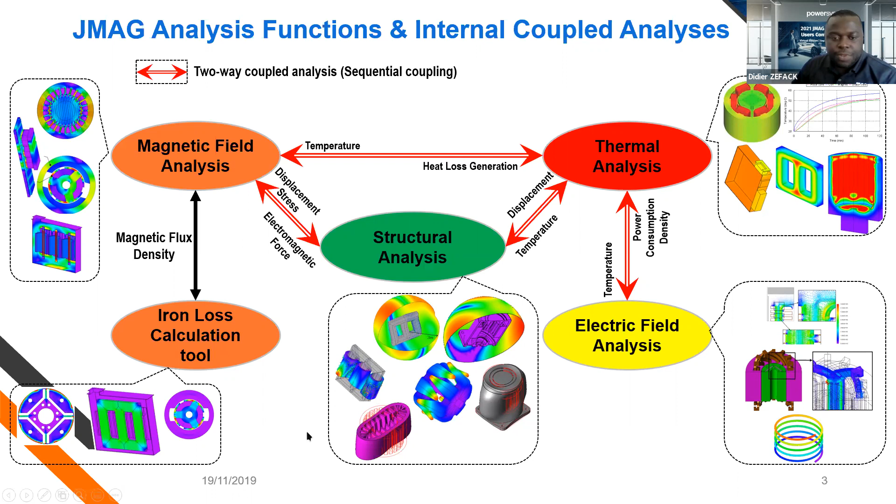But now with the new version, it is possible to make a three-way coupling using three solvers. First the thermal, where you evaluate the temperature. Then you have the structural analysis, where based on the temperature, for example, you're able to evaluate the displacement and the stress. And you also have the magnetic field, where you'll be able to evaluate the forces and the losses. With these three solvers, you are able to make a loop.

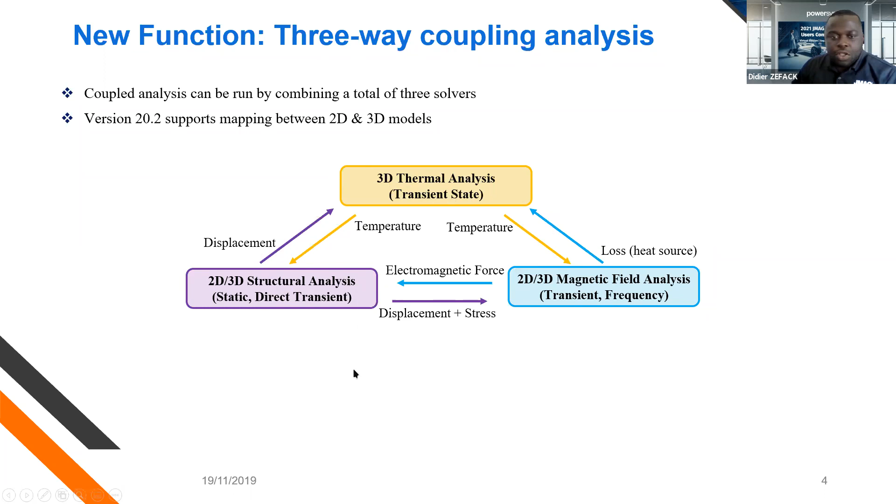The process is very simple to run. In the first cycle or first step, you will start the thermal analysis in order to initialize all the domain. Then JMAG will run next the structural analysis, where you try to evaluate the displacement and stress based on the temperature sent by the thermal. And in the last step of the first cycle, you will have the magnetic field analysis, where you evaluate the electromagnetic forces and the losses based on the output data of the thermal and structural analysis, so the temperature, displacement, and the stress. Then into the next cycle, it will do the same process and so on.

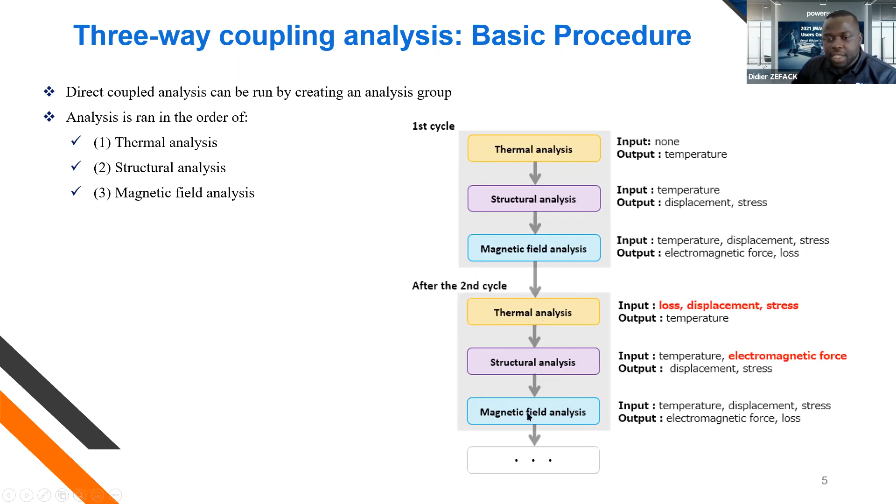The advantage of the coupling is that you are able to manage the simulation time. You have different possibilities. The simple way is to define the same time for all the analyses. The next case is to define different time intervals, so the time interval of the thermal analysis is different from the time interval of the structural analysis, which is different from the magnetic analysis. We also have another case where the total simulation time is different, and also the time interval is different.

And the last possibility is that you can combine transient thermal and transient structural with frequency analysis of magnetic. Yeah, this is possible.

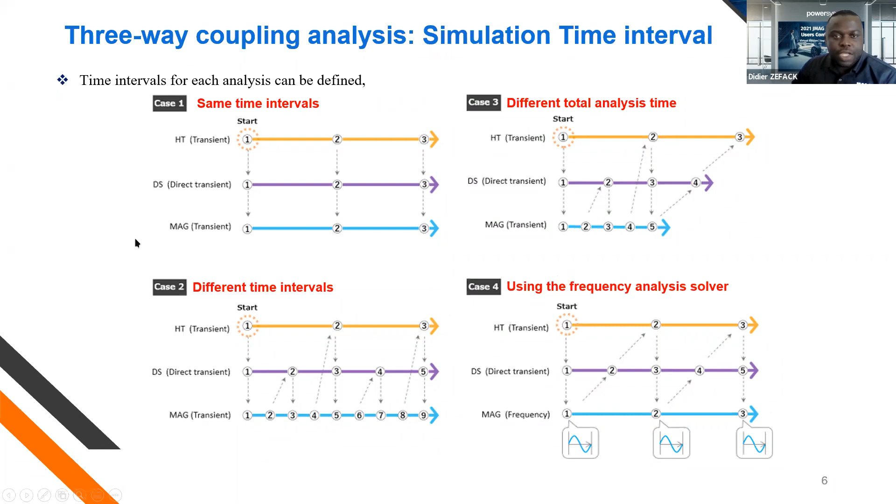So the first application that I want to show you is about the sample thermal expansion effect on the stator. Here I will try to simulate, for example, the effect of the temperature on the deformation of the stator shape. So this is the three analyses that I will build.

The magnetic, where I will calculate the losses, and then the loss will be sent to the thermal, where I will calculate the temperature. Then into the structural, I will calculate the displacement and the stress, and I will make the loop between the two analyses to exchange some data. The structural will send the displacement to the thermal, because the displacement can affect the thermal coefficient, like the thermal conduction coefficient or the thermal convection coefficient. And also the displacement and stress can be sent to the magnetic, because the material property can depend on the displacement and the stress.

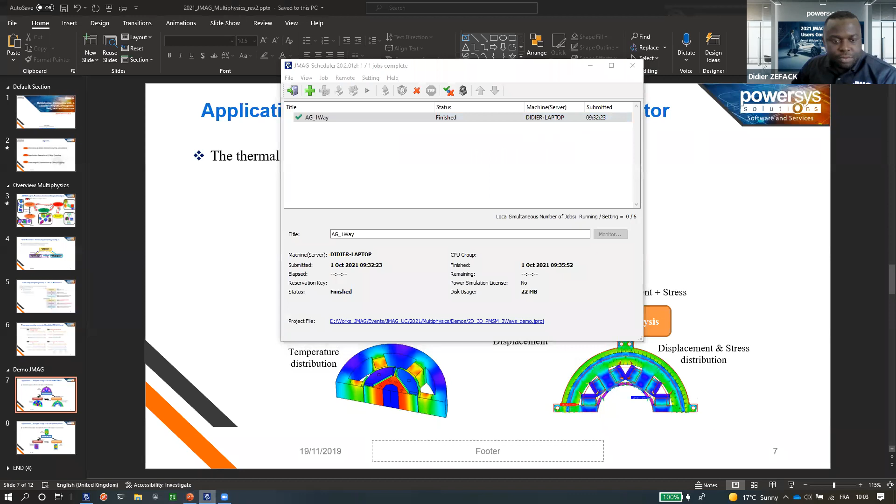So let me go back to JMAG. This is the 3D model that I built. Here I try to run first a one-way coupling, meaning that I will run firstly the magnetic analysis to calculate the loss. Then the loss is sent to the thermal, where I will evaluate the temperature, and the temperature can be sent to the structural analysis to evaluate the stress. But here with the one-way coupling, there's no loop between the analyses. And here you can see that I have created the analysis group, because in JMAG you have the advantage to create an analysis group, where you can group several studies around it.

Let me start with the thermal. Here I can duplicate it, let's say.

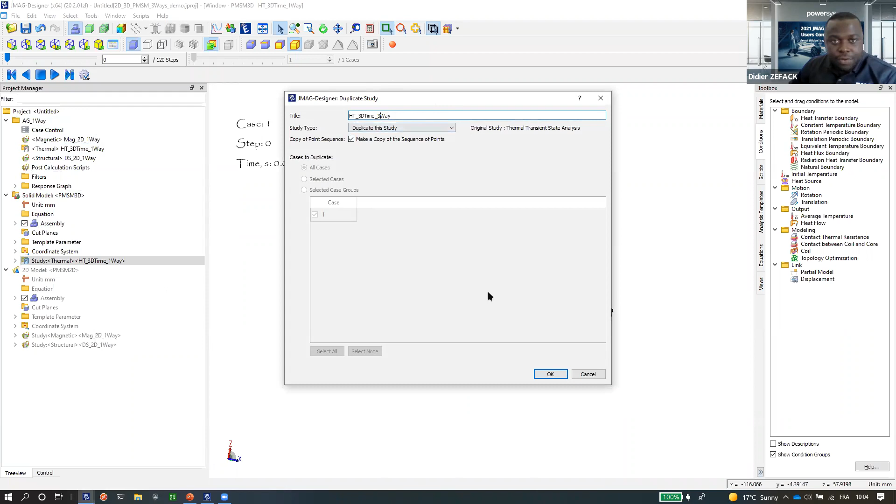So into the setting, the first thing to do is to go to the study property. Here I will select that I want to make a direct coupling to make a loop, and also into the study condition. Here the setting is standard, like the normal thermal analysis.

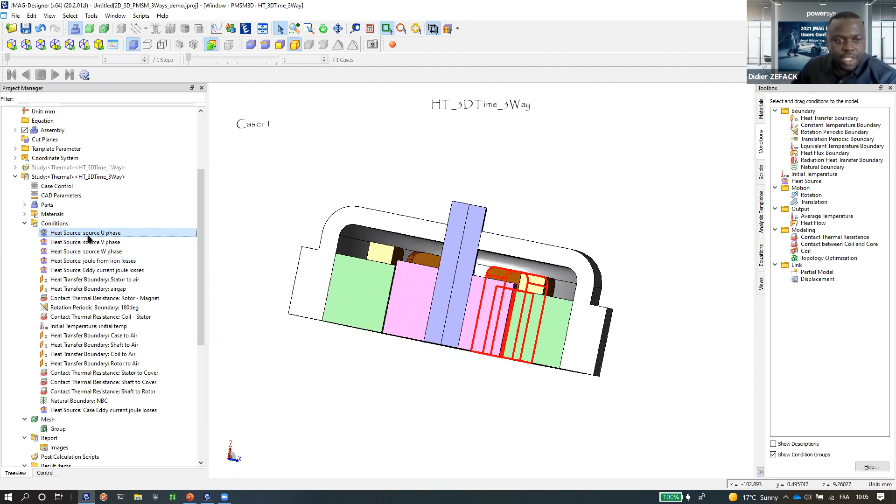Here you will need to define some heat source condition in order to import the loss calculated into the magnetic calculation. If I duplicate, here you can see I run a one-way coupling, specifying the magnetic calculation just to import all the losses. But here I don't want to run the one-way, I want to run the two-way, so I will select a two-way coupling.

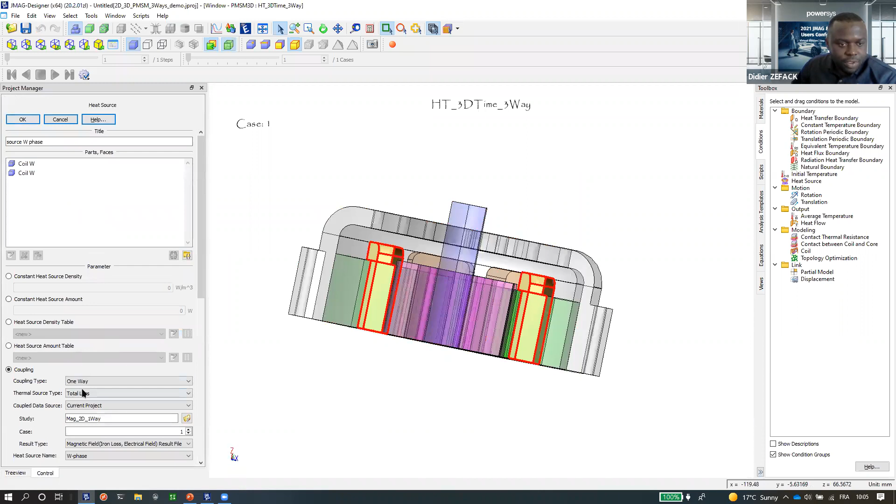I can also do that for the iron loss, because here I can also import the losses. So here I will say that I want to make the loop with the magnetic calculation, and also the other losses, like the eddy current losses. So here I will say that I want to make a loop.

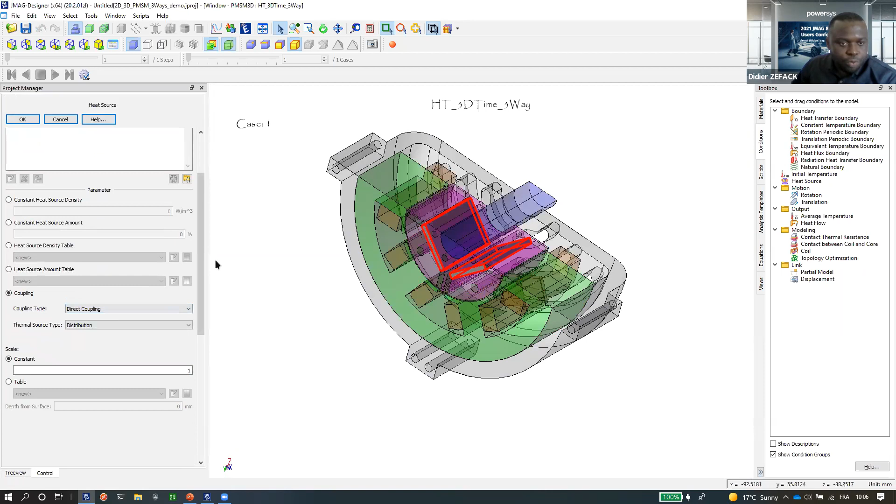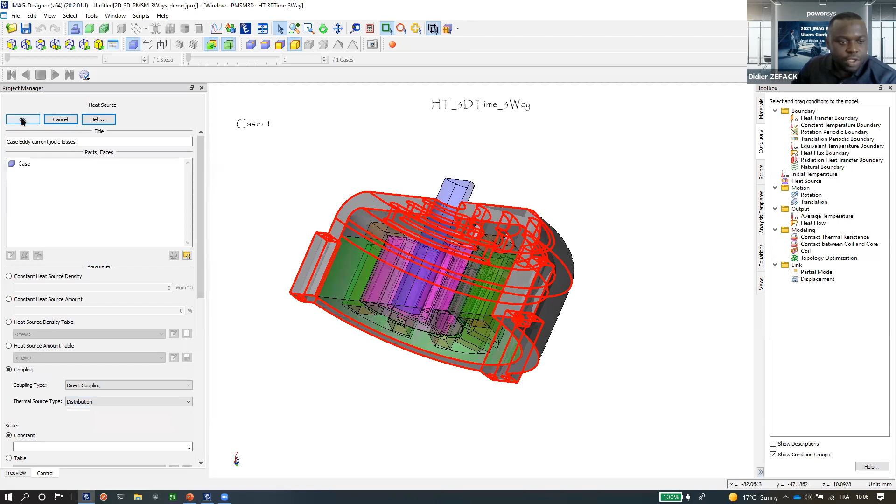Also for the casing, the housing, because in the magnetic I'll also calculate the eddy current losses that you have into the casing. So here I can also say I want to make the loop with the magnetic calculation, to take into account the displacement calculated by the mechanical. So here you can add the displacement condition.

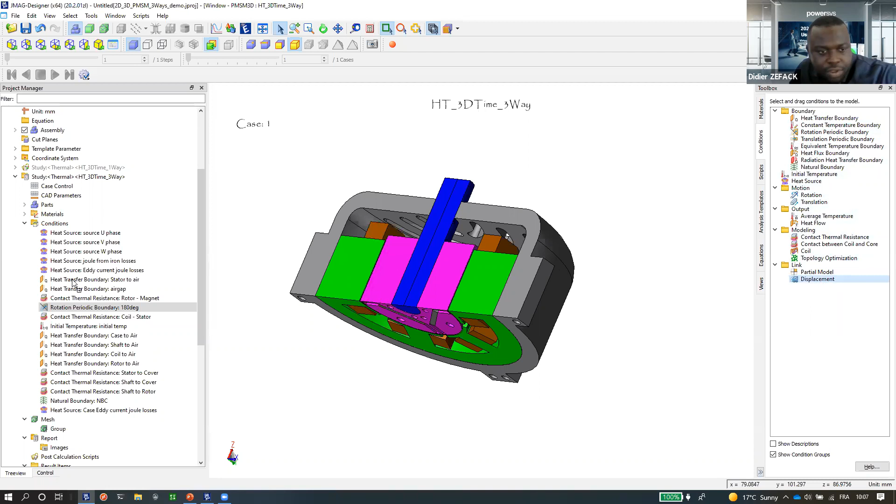I will apply it to the stator only. See here, I will select the coupling, and I can define the name stator.

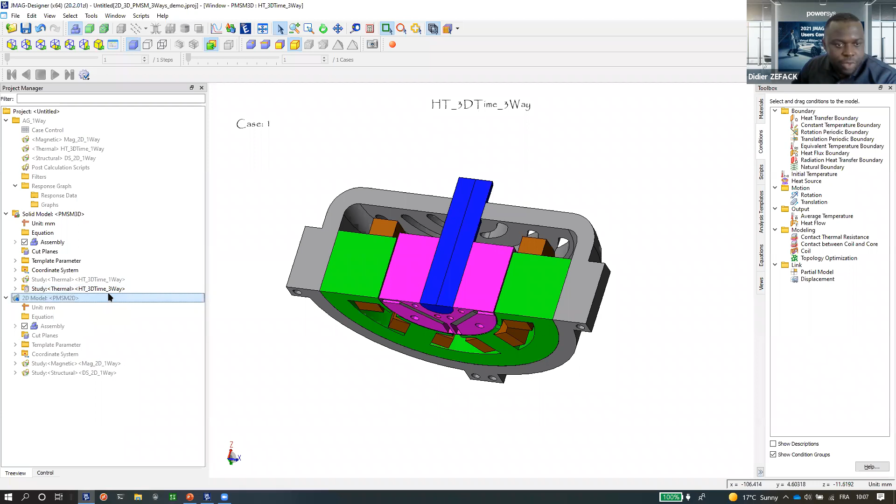So this is the first thermal three-way analysis, and here I will also do the same setting for the magnetic calculation property coupling. Here I will select direct coupling.

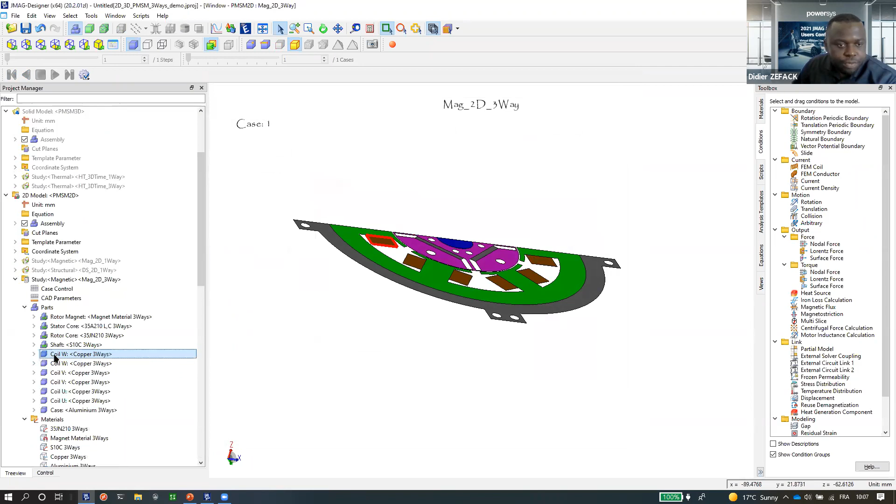Sorry, let me duplicate the calculation. Coupling, yeah. Property, coupling, I will select direct coupling.

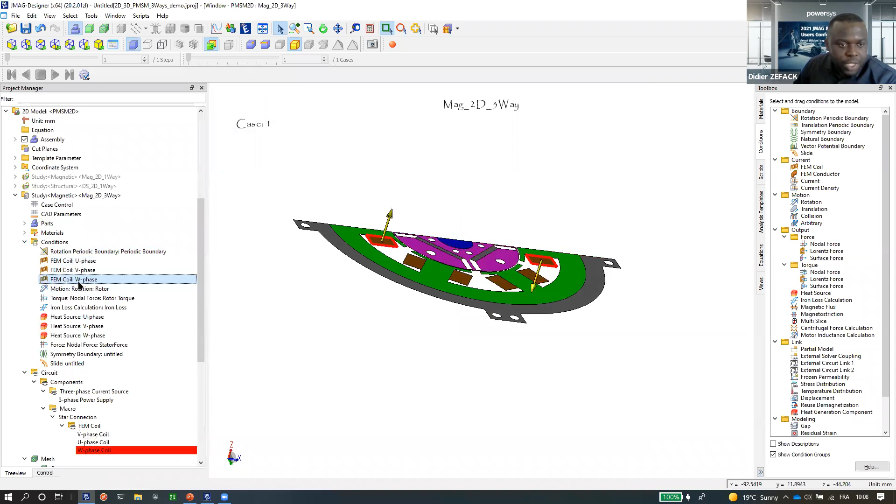So here into the magnetic, the setting, the condition is the same like the normal modeling of the magnetic calculation, but for the coupling with thermal, you need to add the heat source condition in order to send all the losses to the thermal analysis.

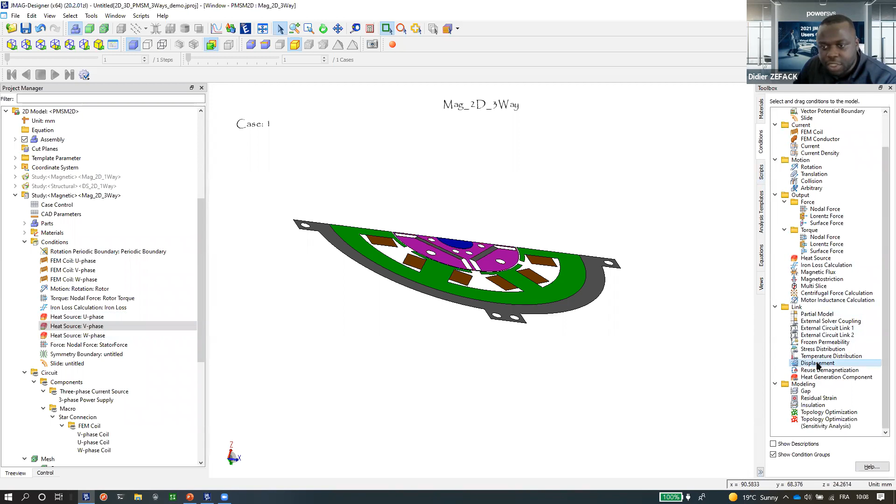But to take into account the stress and the displacement, here I can also add the displacement condition. Say for the rotor, for example, I will say direct coupling, stator. I can also add the stress distribution. I will say one-way coupling.

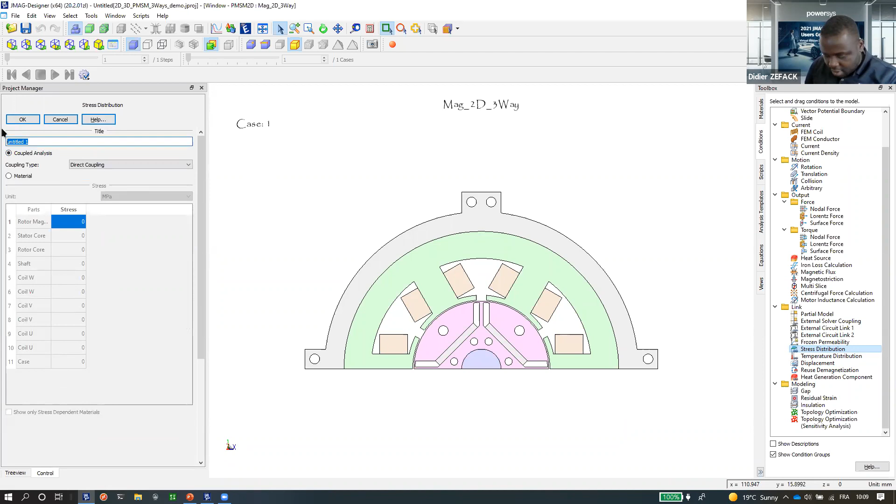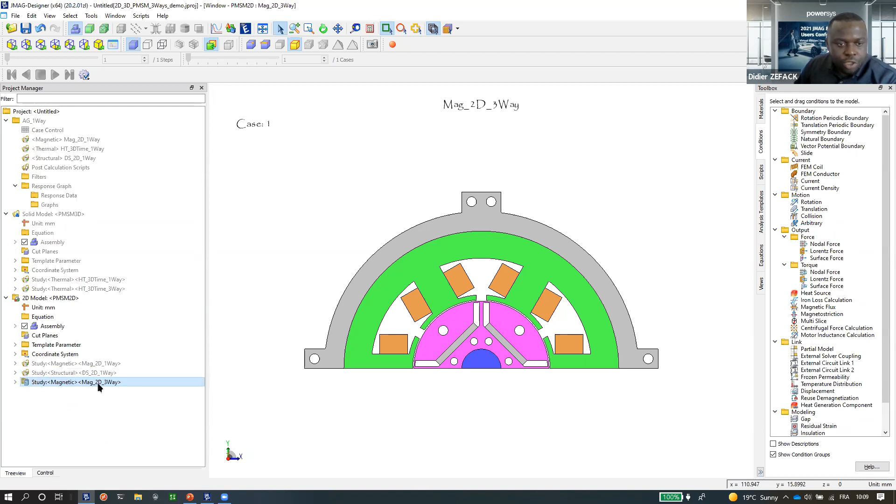So here I have now my magnetic model for three-way coupling. So I will do the same with the structural.

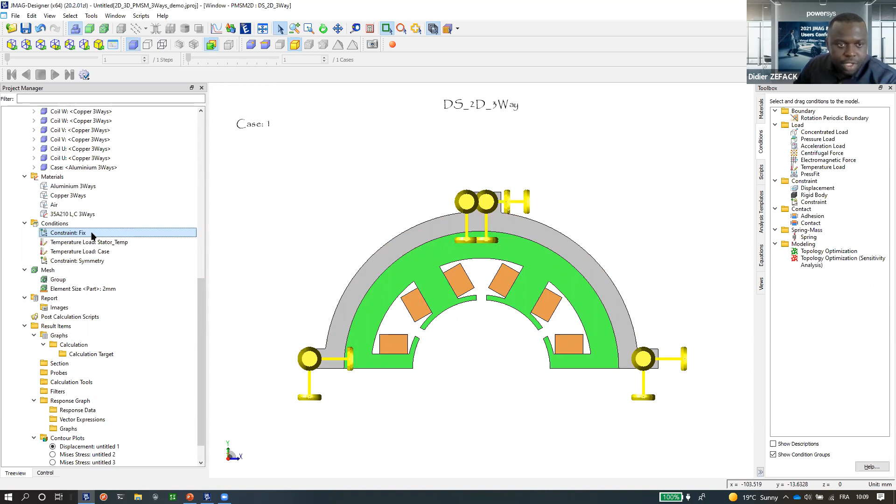Okay, so now it's finished. So here I have my thermal model, I have my magnetic model and the structural model. Then I can create the analysis group.

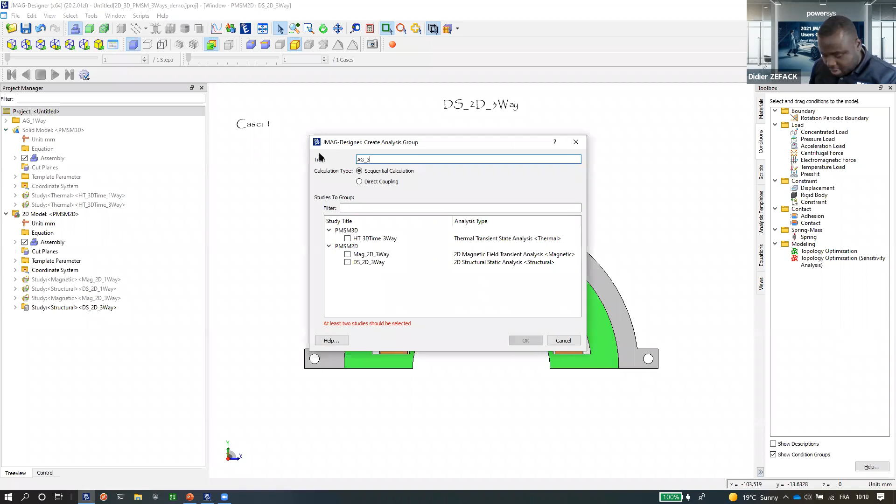Then I will select all the three analyses. Here you will see a new analysis group with the three solvers. So I can go to the analysis group property.

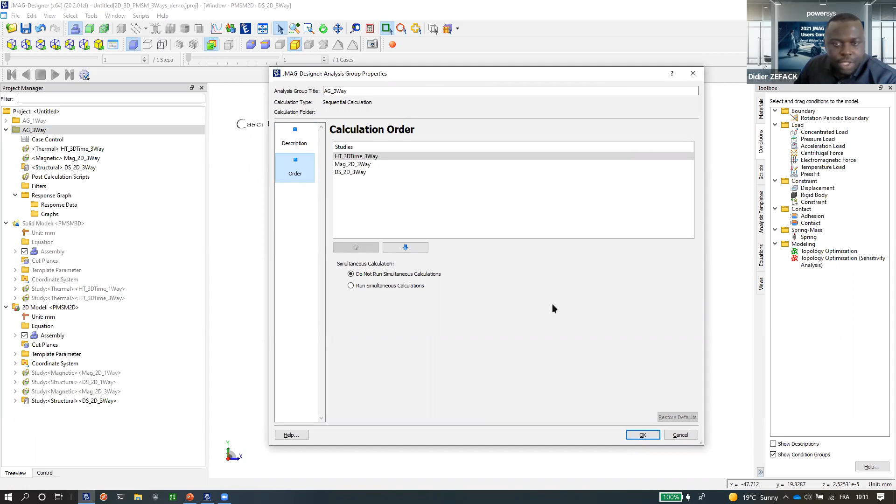Sorry, I'm missing to choose direct coupling. Sorry, this is direct coupling, and then select the three-way sort of. Okay, then I can go to the analysis group property.

So here I will keep the setting of the thermal like it is. So from the magnetic analysis, because I have the iron loss calculation from the rotor and stator, here I will say that I want to import, I want to exchange the average losses of the magnetic to the thermal.

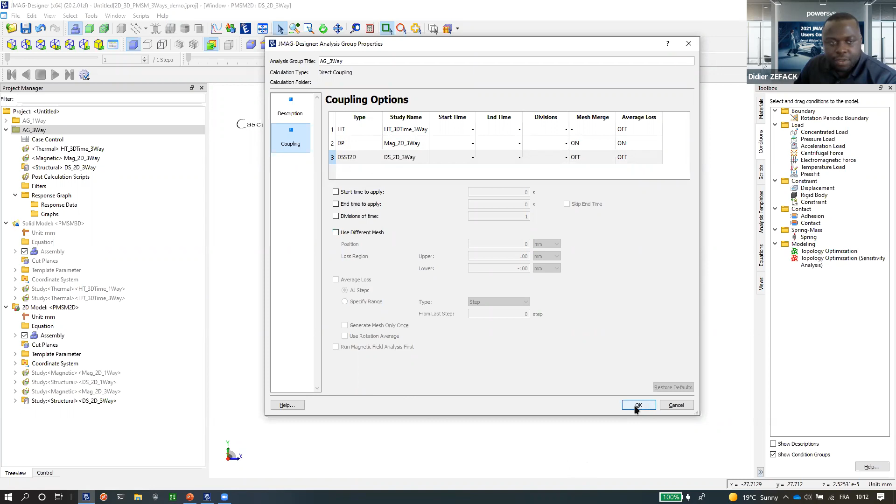Also here from the structural, I will say that I will use the same mesh with the thermal. Okay, so now I can run my analysis to the scheduler. So you go to scheduler and run. I will open the model that I already ran.

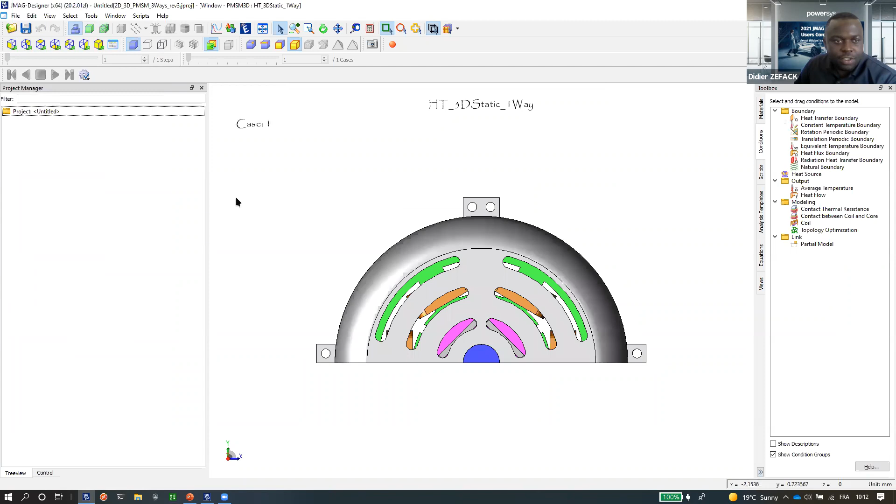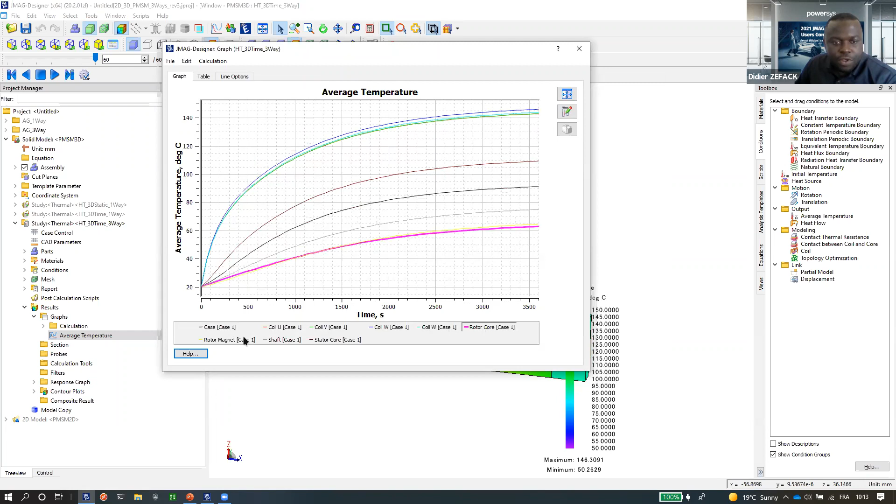Let me show you some results. Let's see the thermal result. Here I can show you the average temperature for each part. So here you have the coil, the case, the rotor, magnet, shaft, and stator. You can also play a little bit just to see how the temperature is changing.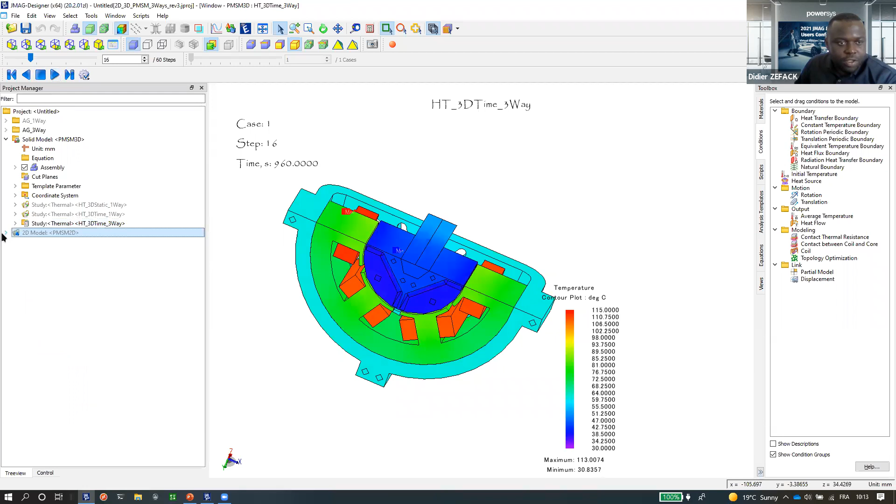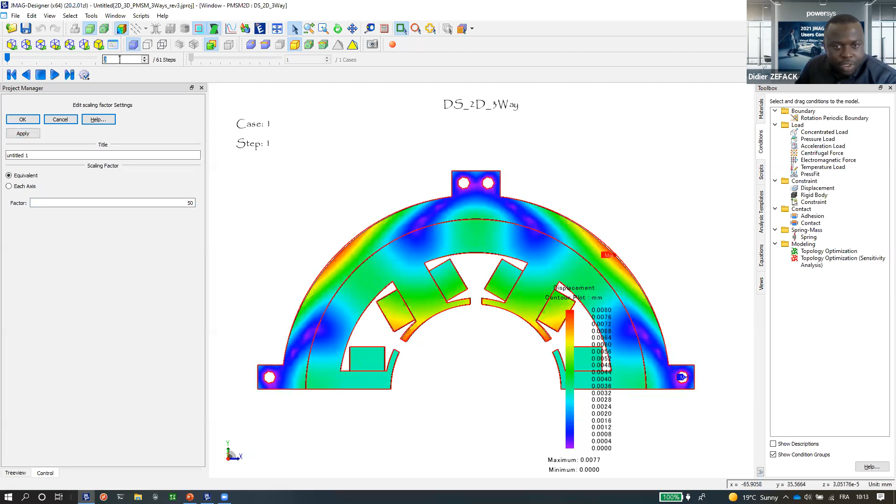I can also show you the structural. So for the structural, here you can see the red one is the position of the initial shape. Then here maybe I can increase a little bit the scaling factor. So here you can see some changing, this is the displacement.

I can also show you the stress. What this means is the stress that you have inside the casing and the stator.

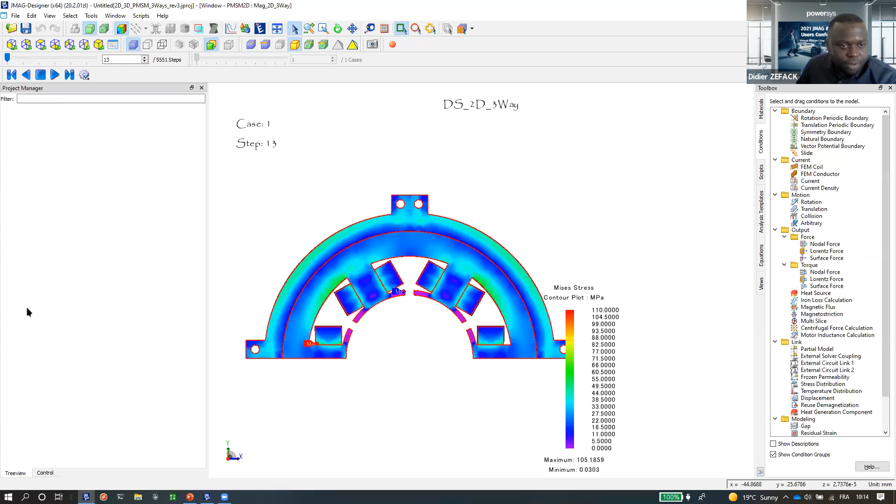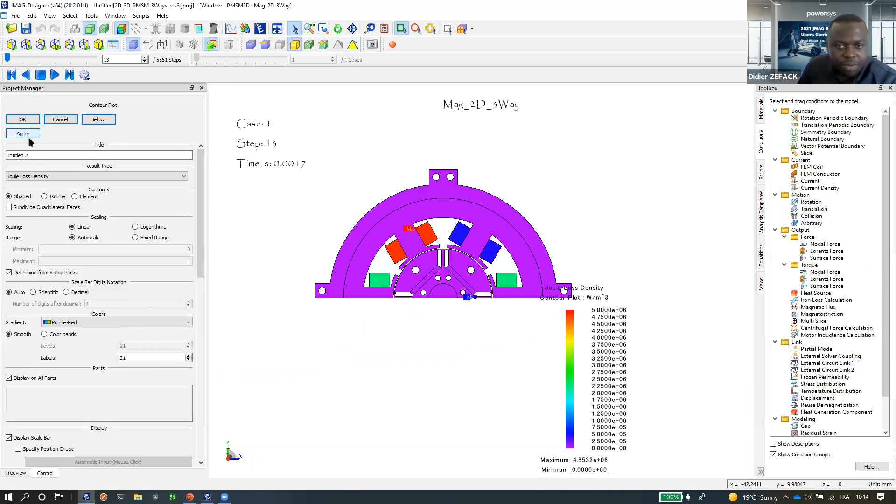Also from the magnetic, so this is the displacement, but you can also check, for example, the losses. Let's see Joule losses, right? Let's see from the magnet, let's see the loss from the magnet here. I can also show you the iron losses if you want.

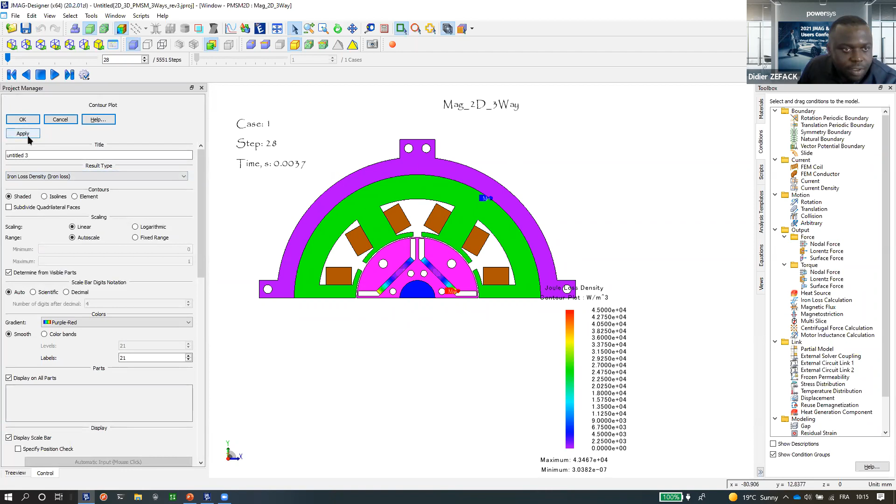This is the iron loss from the rotor and stator.

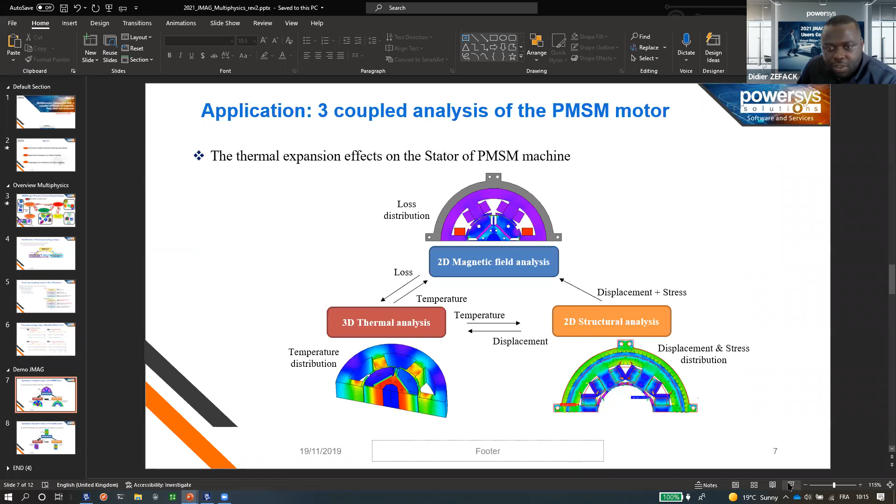So this is the first example using the PMSM motor, but you also have another example with the reactor, where we check the effect of temperature, stress, and deformation on the magnetic circuit. So you can apply this three-way coupling on any type of electromechanical system.

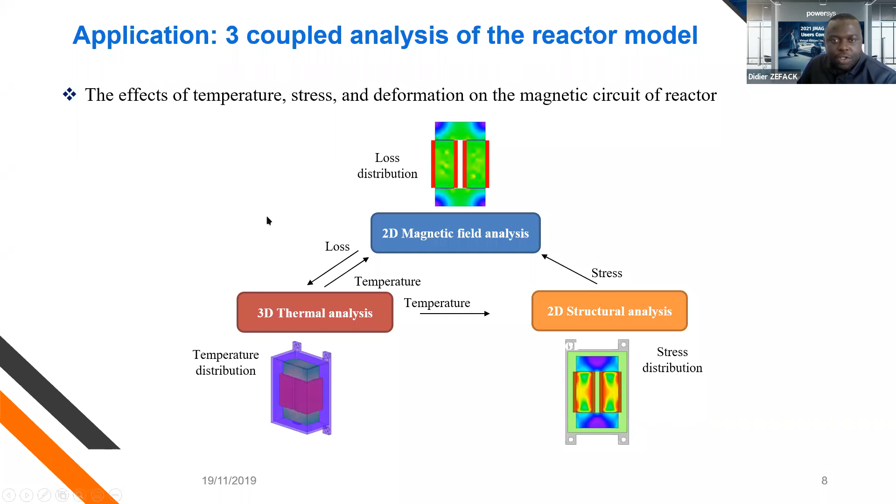Regarding the advantages and limitations, for limitations, we cannot restart the three-way coupling. Only one study can be specified for each solver. So for example, you cannot combine two magnetic with two thermal with two structural. You only need one analysis per solver.

Into the magnetic analysis, you cannot create or use axisymmetric models. And when the simulation is very large in the thermal and structural, you cannot use the loss averaging function.

For the thermal, the three-way coupling does not support the steady-state thermal analysis, and also contact cannot be taken into account. For the structural analysis, if you define the rotation motion or transformation into magnetic and thermal, the displacement cannot be taken into account into the structural analysis.

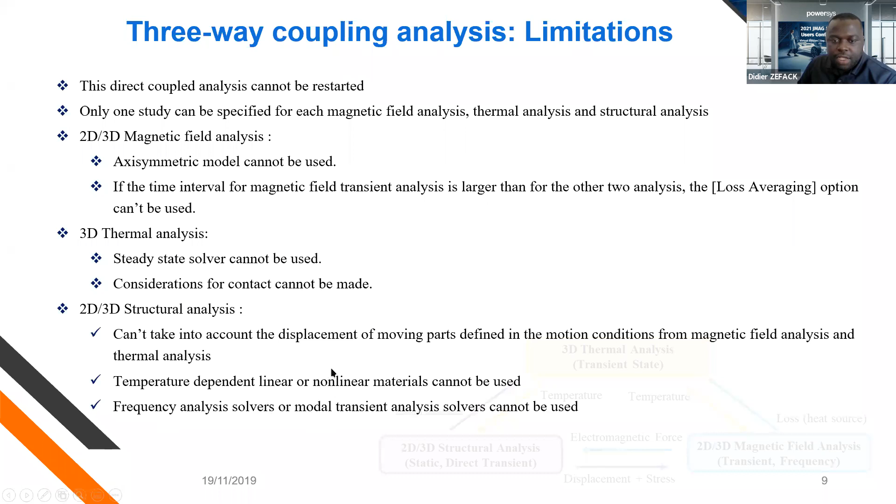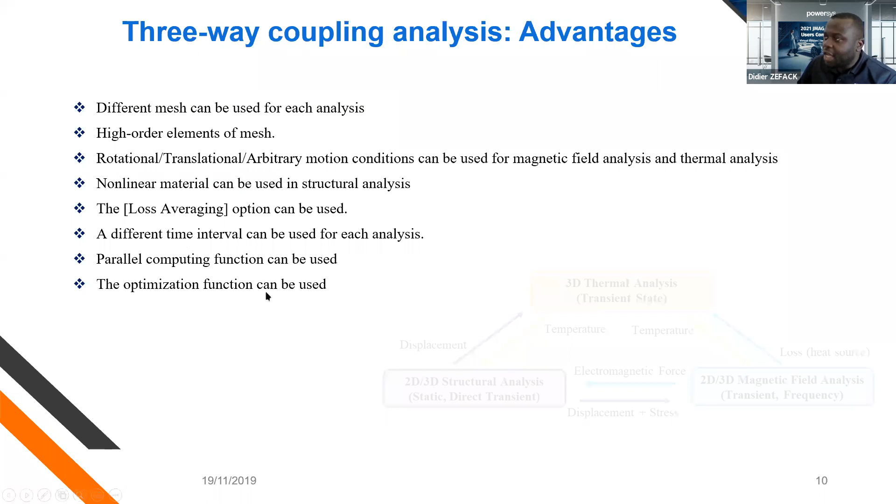For other demos and other features, you can follow this on YouTube. We have a lot of demonstrations on YouTube. Thank you for your attention.

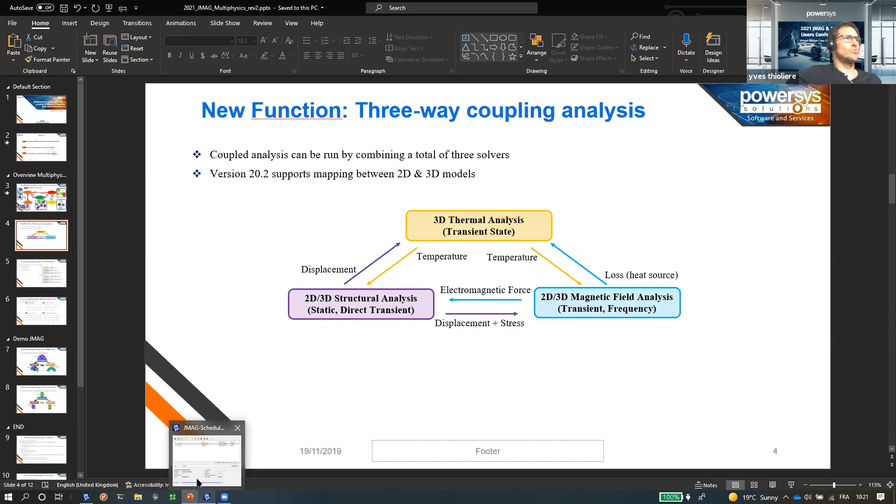But the displacement, for example, I would like the displacement to not only be due to the centrifugal force, but also the nodal force that is calculated from the magnetic, and also due to temperature, due to the thermal expansion.

Yes, so for the structural, I think you have several conditions that you can apply. You have the electromagnetic force, you have the centrifugal force that you can apply, and maybe thermal load. Yes, here I only use temperature load, but you can use all this load. So it might be possible, yeah.